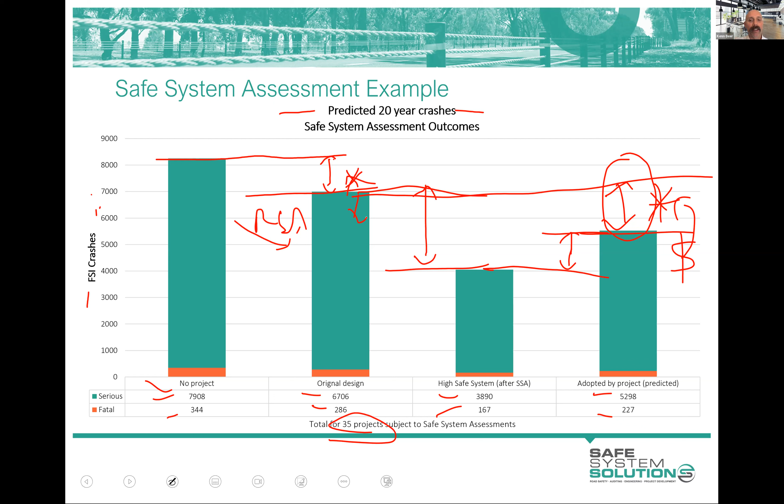One of the really interesting insights to me, the first thing is that this is naturally going to come down. The act of having your project safe system assessed as a designer will mean that your next design will be better in terms of alignment with safe system principles. You get that feedback. You see this and you go, oh, okay, that's interesting, or maybe I should try that for the next one. I'm going to get a safe system assessment done on this, I know what they're going to want. So they're going to get better and better. It's actually a wonderful education tool from that perspective. Road safety audits have been doing that forever. They're a great education device as well.

This is really interesting though, isn't it? We just talked about our aspiration of zero death and serious injury, and safe system assessments being this wonderful tool which is going to help us get there. Except these have had safe system assessment, and these are the highest alignment things that the safe system assessors are recommending. Yet we still see there 3,890 serious injuries and 167 fatalities over the next 20 years.

Now, in one sense, this sort of shows that the evaluation was a fairly realistic model. And if you look at what are in these crashes, we sort of call this the residual. These are things like motorcyclists, and it's very hard with the infrastructure and any behavioural change initiatives or anything like that to reduce and eliminate that trauma. Some very high-end speeding crashes, we talked about those, really high-end inappropriate stuff. So they're big chunks of this trauma.

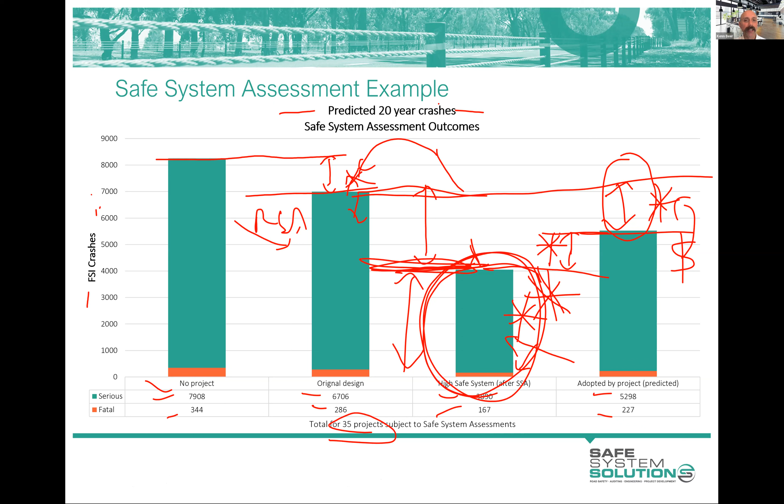We can bring this one down through some cultural change initiatives and trying to lobby for more funding and better community support and those sort of things. So hopefully we'll see all of this come into play better. So hopefully that makes sense to you. And I do that just to show that this is a really valuable exercise to go through. There's some actual independent evaluation reports that show that. And we want to start integrating it heavily into our infrastructure design planning process.

And I've pointed here to some benefits. I want you to be going out there and doing safe system assessments and encouraging your clients or your colleagues to be doing safe system assessments, and you can be the one to help them do that, because the more of these we can do, the better. We'll see more progress in our attempts to really turn around the death and serious injury happening on our road network. So a few more things to arm yourself with in terms of benefits of safe system assessment.

It's a great way of determining how well a project or proposal aligns with safe system principles. And that is something that we've craved for a long time as industry, because people were shouting around about safe system. Oh, we're committed to the safe system. We've got to do safe system. And people are like, well, what does that actually mean on the ground? How do I actually do that? This is a good way to do that.

Great way to compare project design options. So at the moment you're in the middle of doing a safe system assessment on just one design option. But if you had three, it'd be a really nice way to score them and to see that difference. A good way to inform design changes that'll move a project closer to the objectives of eliminating death and serious injury. Good method for assisting planners, designers, project managers to move the safe system approach from theory to practice. And that's what I talked about in the first dot point there. Sound basis for future planning and design of infrastructure.

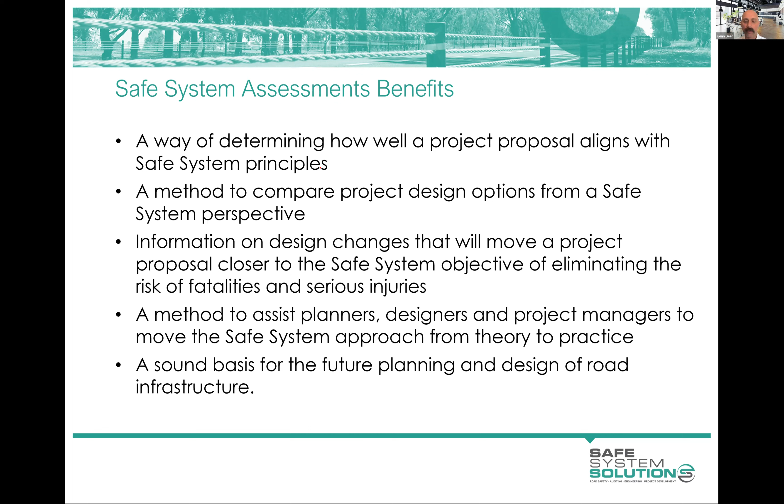So really beneficial stuff. But let's talk about the process. Okay, you know now how to do a safe system assessment, and you're going to prove to us you understand how to do one and how to fill the things out. But in terms of the context of a process within an organization, road authority or the like, when should we be doing this? So if we take the steps of development of a project and we say concept, draft, details, build, and open it to traffic, and by traffic there, I don't just mean cars, I mean pedestrians and cyclists as well.

So safe system assessments give the best value at these early stages. And then road safety audits are really well suited after we've got some detail there. There's a few reasons for that, but one big one is often here you're dealing with multiple ideas on how this can be achieved. So you have options on the table, and this helps you rank options. Road safety audits don't rank options.

The next one is that we're looking for safe system assessments and safe system assessors to really push a project team to strive for higher safe system alignment, to really get it better from a safety perspective. A road safety audit's really about managing any risks within that project, that you're not creating new risks as a result of building this. It's less about looking for opportunity to get better safety benefit.

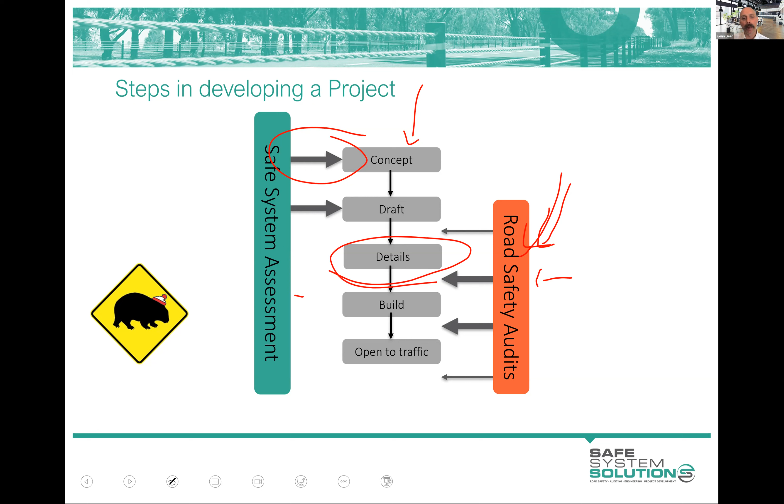In terms of those differences, both a road safety audit and a safe system assessment do a good job there of identifying the likelihood of crashes. The severity of crashes is generally better done in safe system assessments because of the way it's scored and thought about and segmented up. I say sometimes for road safety audits, and the way that the 2022 Austroads Guide to Road Safety Part 6 is now framed, it should be better.

Identifies issues that impact exposure. Well, that's pretty rarely done, if ever, in a road safety audit, but it's its own entity within a safe system assessment. Recommendations that improve road safety outcomes. Well, they both do that. We can't say they don't. Considers all road users. Yep, they're both able to do that. Focuses on fatal and serious injuries only. Well, that's the aim of the safe system assessment, whereas a road safety audit will also look into other injury and minor bingles. In practice, safe system assessments do that a bit as well, but in theory, they're just focused on the fatal and serious injury.

Looks into safer vehicles, people, maintenance impacts, post-crash care. If that's part of the scope of the safe system assessment, it's all set up to be done with those qualitative questions we went through yesterday. Makes recommendations to redesign the project if required. Whereas audit's really not about redesigning the project, but highlighting risks and pointing these things out. And encourages innovation. I talked about this in module 1, where an audit is there to pick up risks and does not report on the good stuff. That's not the audit team's role. They simply point out the risks.

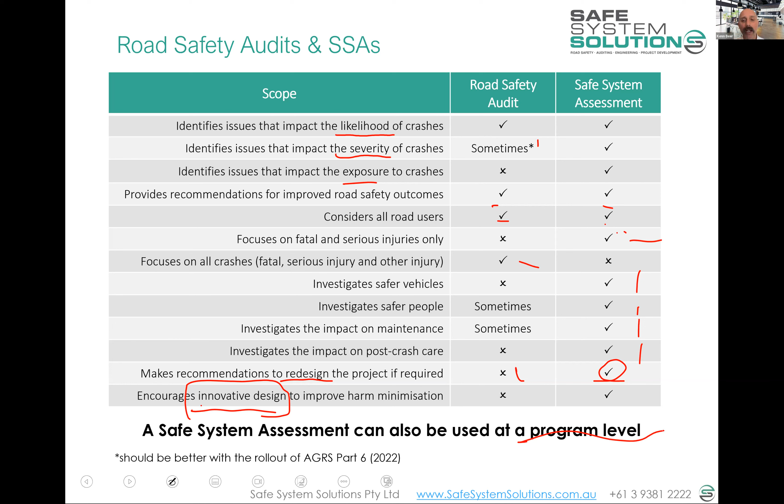So we'll run through, after somebody said, yep, we're going to do a safe system assessment on this project, how that process sort of plays out.

We will have our little break at some point. Kathy, you're going to have to, oh no, I've got my watch on. I can work out when a good time for that is.

But let's have a look at this process. So I haven't yet introduced you to the fact that there's two types of safe system assessments. There's a full safe system assessment and a rapid safe system assessment. If you're in Queensland, you call the rapid a light safe system assessment, but it's all pretty much the same. I will, in one of the slides coming up, show you the difference between those two. It's not like one takes an hour and the other takes 10 days. They're fairly close to each other. But one does have some efficiencies in it. But the client is going to decide that. And I say client, it could be the road authority, it could be the project manager, it could be the project sponsor, whatever it is, they're going to make that decision.

And then they're going to go out and seek a safe system assessment team. And so the client, the designer, whoever's going to do that is going to find either a consultancy or people from another department or whatever it is, and get them and engage them to undertake this safe system assessment.

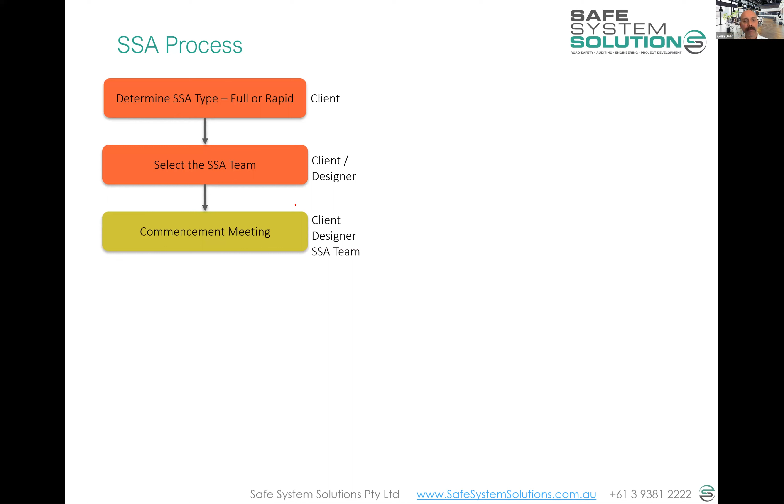And there'll be some sort of commencement meeting, some sort of thing where people get in the room or on Zoom or Teams or whatever it is and discuss the project. And this is where they're trying to really understand the context of the project, ensure that all the information's been passed across, find out things that are needed in order to get a really good understanding of the assessment and make sure it's a rigorous assessment. That all happens there, and everybody's kind of involved in that.

Then it's really over to the safe system assessment team, and they'll get out and they'll look at the site with the plans and review things and predict crashes in the future and look at how it currently operates and what the pedestrian desire lines are, and a lot of thinking like a road safety auditor would do, but starting to more systematically work through those columns of the matrix, so the different crash types that could occur and the exposure to it and the likelihood and the severity of it, and making notes and thinking this all through for the existing conditions, then for all of the design options.

And that's all popped into the safe system assessment matrix, and you're getting hopefully quite good with that, and you've used it, or you're going to use it very shortly. Then the other elements of the safe system are considered, utilizing those qualitative questions that I went through at the end of last module, where we ask questions about the post-crash care and what happens in the event of a crash, how do people get there, are there going to be challenges, and all of those questions, and sort of just dot point out thoughts and ideas and things that could be of interest to the project manager and designer.

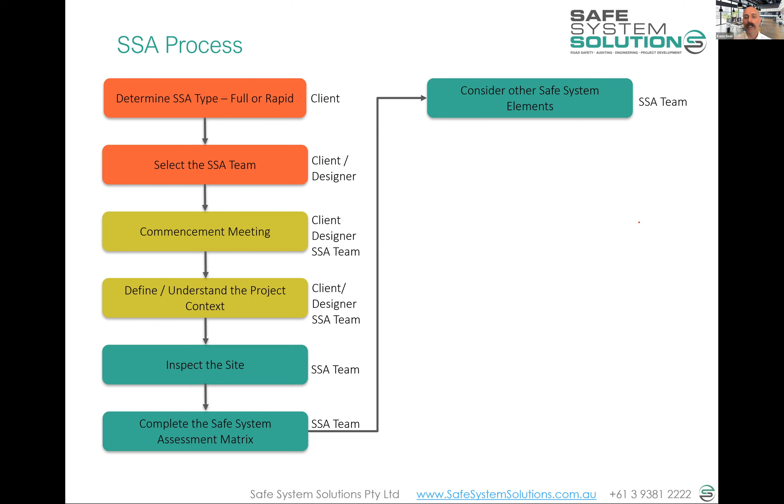Then you make these comments on any treatments that could be implemented within that design that would improve safe system alignment. So things that they could add, things they could alter, changes that could happen. And you do that for every single design that they've produced, every option. So if they give you an option for signals and an option for a roundabout and an option for a seagull and an option for a passively controlled intersection, each one of those you would talk to how can that be improved to get better safe system alignment.

And then you've got all of that and you document that in your safe system assessment report. And I pointed you at the Victorian government's template, and that's what you're using. You're welcome to use that yourself, rebrand it. They are very clear on their website to say, please use this, let's all follow the same report format. And if you do that, you're going to cover off all the sections required and it guides you through quite nicely. And there's one for a full safe system assessment, one for a rapid safe system assessment.

Queensland does have their own. They've hidden it in the Safer Roads team's file in TMR. So you have to ask them if you're in Queensland and you want to use that. They don't seem to mind if you use the Victorian template. They're very similar, but every other jurisdiction's generally following the South Australian and Victorian sort of template. So it's become pretty much the national.

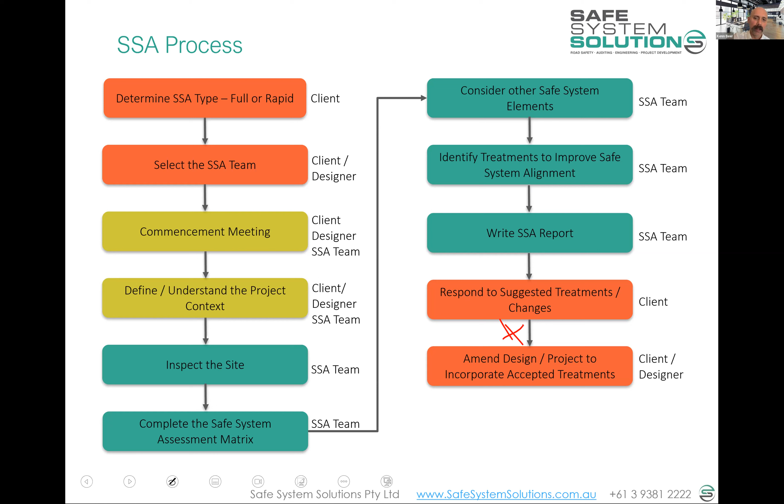In here, it can sometimes come down and then get rescored. So as a client, or as a designer, or as a project manager, you've been given these ideas, and you say, okay, well, we'll do that one, we can't do these three, we'll do that one, and we'll do that other one. You can go back then to the Safe System Assessment team and say, can you give us another score on that, please, with these new incorporations?

And that to me actually is a really wonderful thing for presentation of your project up the line to your directors and your different committees, approval committees and the like. The reason why is you can provide this: here's the existing conditions, here's the design that we produced, and here's what we've got to after the safe system assessment. So you show that benefit and you say, well, we've really worked hard to get as high alignment with safe system principles as we possibly can. And there's proof of that, taking on this advice and trying to incorporate it in.

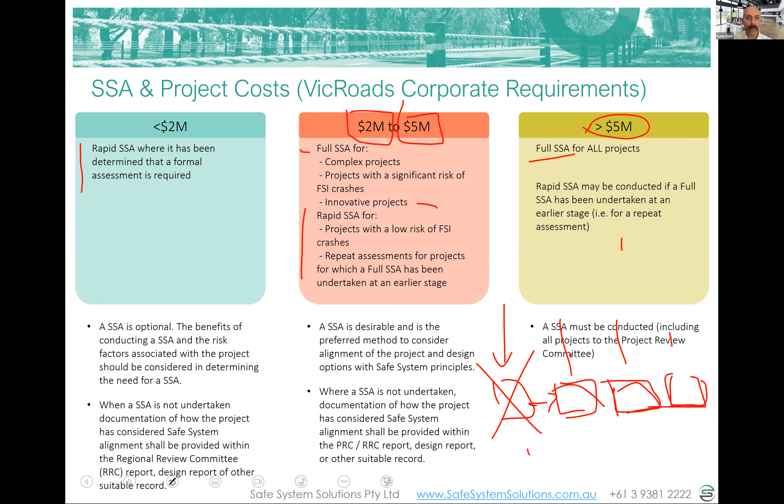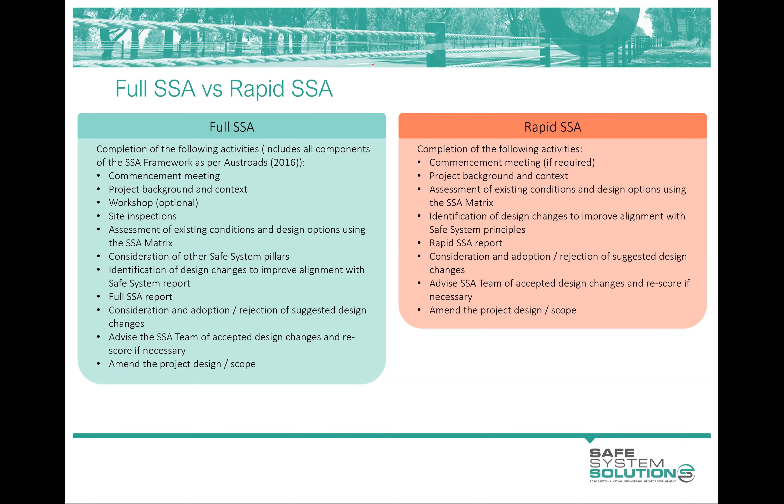We'll pause there and see if we have any questions. Yeah, Ken, will the Registered Professional Engineers Victoria affect being added to the list? No, it won't affect that. There is no requirement to be an engineer to be on the list of recommended safe system assessors or pre-qualified safe system assessors in South Australia.

The engineering registration bill and the like is simply trying to provide some sort of assurance that engineers are active, practicing, keeping their skills up and the like, and competent in what they're signing off. But no, it's got no connection whatsoever. Good question though. I toy around with whether it's a good or a bad thing. I'm slightly off topic here.

Queensland has had the registration for a long time, and there's a little bit of reluctance in Queensland. This is my opinion, I haven't done a structured study on this, but to innovate or to alter, to deviate from documented standards and guidelines with road infrastructure, due to the fact that they feel they're taking personal responsibility or accountability if they do that, and that's all due to this engineering registration. And so I think that's a bit of a downside, because we can't progress if we just follow standards and guidelines.

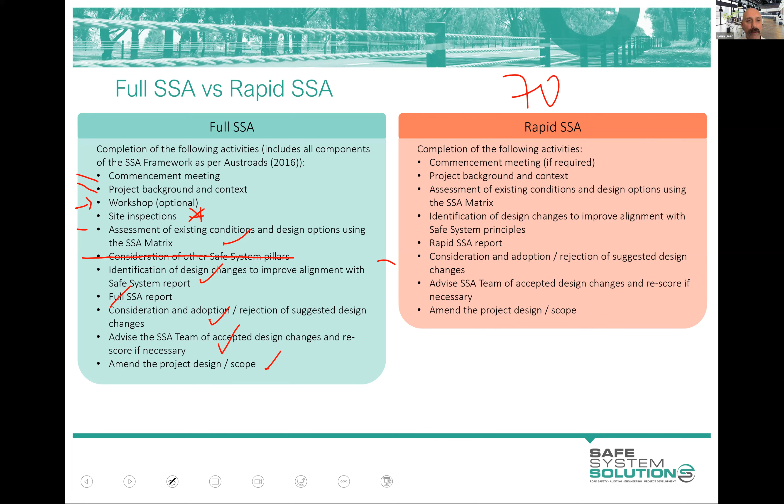So I'll pause there to take any questions from the group associated with the process of doing safe system assessments, what different jurisdictions are doing, that idea of getting pre-qualified or on that list of recommended safe system assessors. See if anybody's got any questions on that, and then I'll give 5 minutes, and we can fill up our afternoon coffees and have a stretch, and then I'll do a short, maybe 20 minutes of discussion about some general safe system road environments. And then I'll give Kathy an opportunity to just show you in the learning management system how to finish off the course.

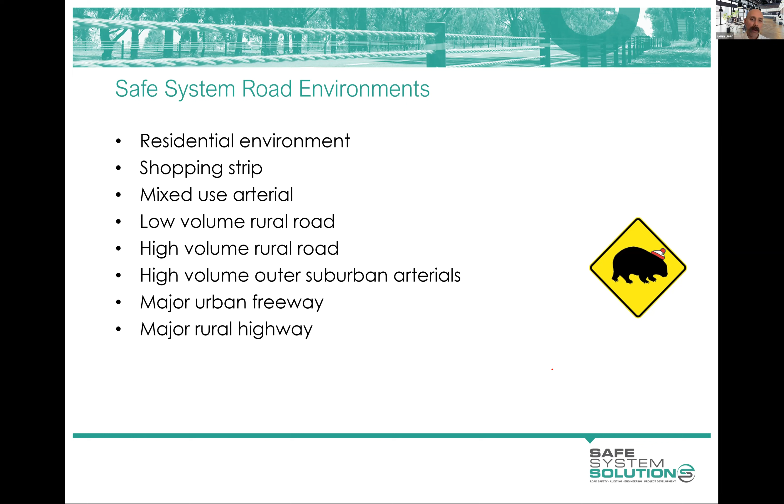So I want to cover off residential style environments, shopping strips, mixed use arterials, low volume and high volume rural roads, high volume outer suburban arterial type roads, major urban freeways, and major rural highways. So if we start on these residential street environments, I think I will get you to type a few things in. It's been a fair bit of me talking this session.

Just pop in the chat any ideas you might have to get better alignment with safe system principles, so reduce the risk. And is that going to be exposure, likelihood, or severity? I'll give it a minute here, see if we get.

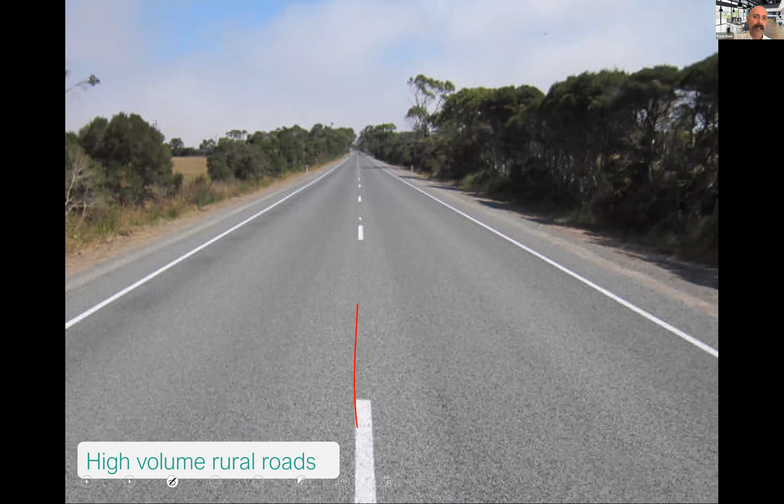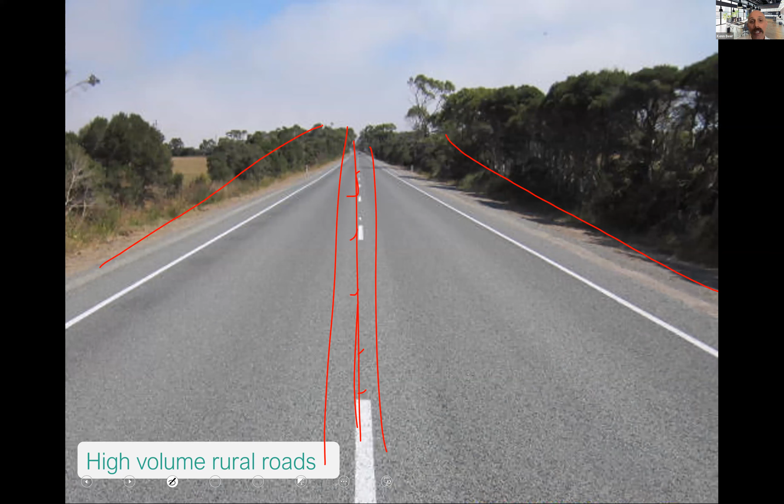And let's keep going. When we do have the higher volume roads, now this is a higher volume road. It doesn't look like it at the moment, but trust me, it is. You don't stand in the middle of the road when it's very busy. These are the ones we're going to invest the money in the infrastructure of providing those central barrier systems, and then outer barrier systems, hopefully, and getting really good safe system aligned roads to keep speeds high. And we want to attract people to use this road instead of that other road.

And as we get to the intersections, we're going to try and manage those speeds within tolerable levels. I think roundabouts and compact roundabouts are going to be huge. If you've got a central barrier system, it can work really well to think about, well, okay, vehicles coming out of access points, driveways and the like, they can come down here and they can U-turn to go back that way instead of having to have a break in your barrier system, for example.

And if you strategically plot out a route like this and do a proper route strategy and a corridor strategy and think about things from that sense, you can really create some pretty nicely aligned safe system environments, targeted roundabouts, and then some intersections you might be able to make left in, left out as a result of that. And potentially you still do have to have some different turn facilities at different points, but that, at a very high level theoretical way, is a pretty wonderful way to treat these roads.

If you can't get the roundabouts, there are your different options, which we've talked about some of them. I think the rural intersection activated warning signs or speed signs, or the stars, are pretty good. A lot of those in Victoria, New Zealand, Queensland starting to put a few in, which is where a speed limit on the main road as a vehicle approaches here drops down to maybe 70 from 100 or something like that.

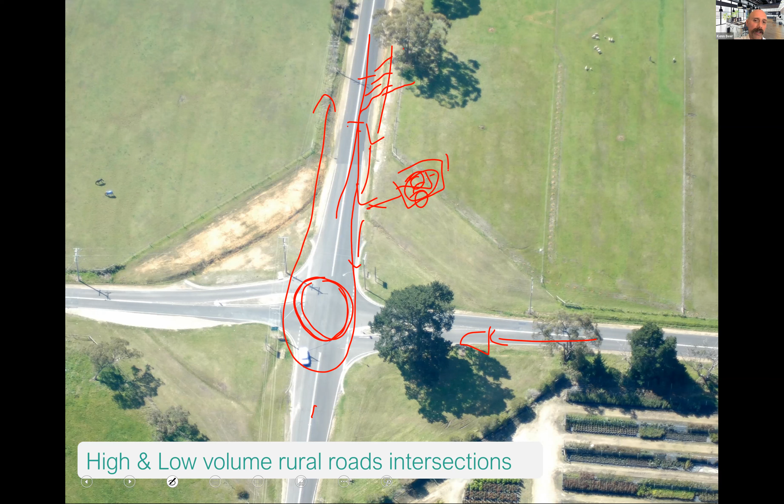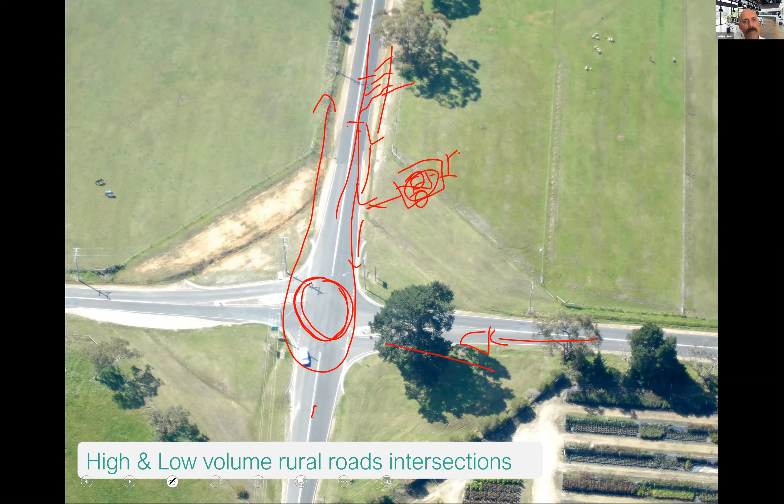South Australia is doing some trials on radar-based, solar-powered signs, really cheap stuff, which is pretty exciting. I'll do a few more and then I'll hand over to Kathy. High volume outer suburban arterials and rural arterials are the ones that have been designated traffic routes, and that is a traffic route.

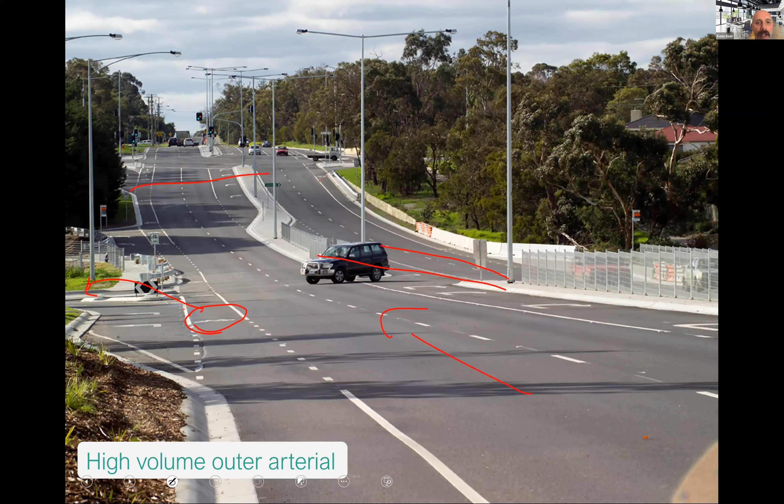We start to really need to make sure we don't have vulnerable road users mixing on these higher speed 80-kilometre-per-hour roads; those have got to be separated facilities. We're trying to block off these different turn maneuvers because the crash forces there are too high. We're still interested in the conflict points and slowing vehicles through the intersections because we know that they're that area of danger.

This is where you look for underpasses or overpasses for pedestrians, separating pedestrians off, not having that access. So they're not great places to congregate, to hang out, to have a coffee and things like that. That's not their function. That's not their movement and place categorization. And so we're more free to do some of those restrictive things.

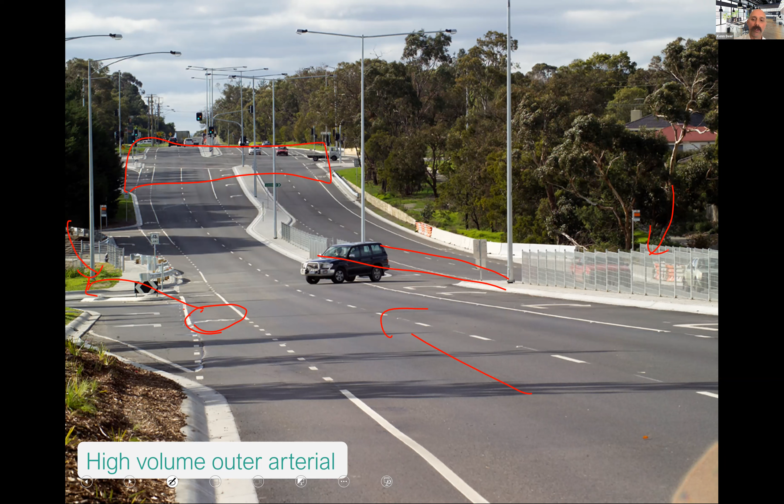Major freeways really operate with quite high alignment with safe system principles because they don't have right angle intersections. They don't have vulnerable road user presence, crossing and the like. You do actually get quite a lot of pedestrian trauma on motorways, which is more a result of vehicles breaking down, or vehicles like taxis pulling over in the wee hours of the morning, and usually intoxicated people getting out and throwing up or whatever they're doing, and there's incidents associated with that. So it's quite surprising how much pedestrian trauma there is on motorways.

Cycling trauma there's very little, next to nothing. But it does have these really good aligned features with safe system principles. The point where they don't do well from a road safety perspective is as flow breaks down, because when it's free flowing, it has really great road safety performance. When it's absolutely congested, there's not enough speed to cause damage in the crashes. It's as flow breaks down, but there's still the speed there.

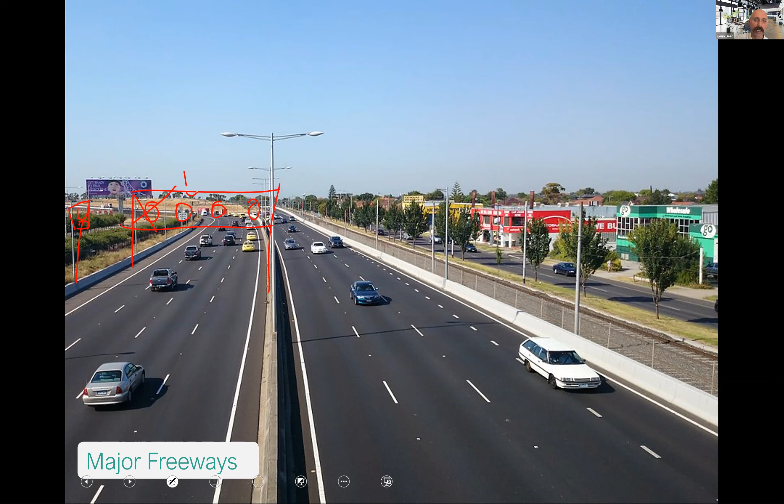But anyway, our managed motorways are an amazing tool in this space, which is where you have lane management systems. You have on-ramps with ramp metering, where you've got your traffic signals to balance that flow. You can use lots of technology to block off lanes, to change speed down proactively, to warn of things, and we get lots of benefit out of this. Doing the safe system assessments on these urban motorways, it's still the same process, but you often are delving into ITS, intelligent transport systems, managed motorway stuff, electronic communications, how control centers are set up, and thinking holistically around processes behind the scenes as well.

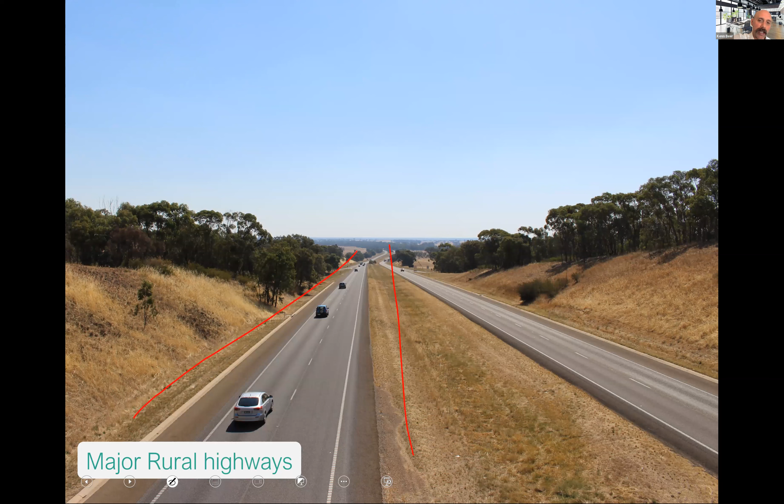And major rural highways, I'll finish on this one. We saw that our continuous barrier systems are what gives us our high alignment with safe system principles. And we're seeing that roll out on many of the major rural highways these days. We know people are going to fall asleep. We know they're going to run off the road, and we need to try to manage the energy in that. We're going to try and stop them doing that with audio tactile edge lines and good rest areas and all these things, but they will continue to do it, and we need to manage that.

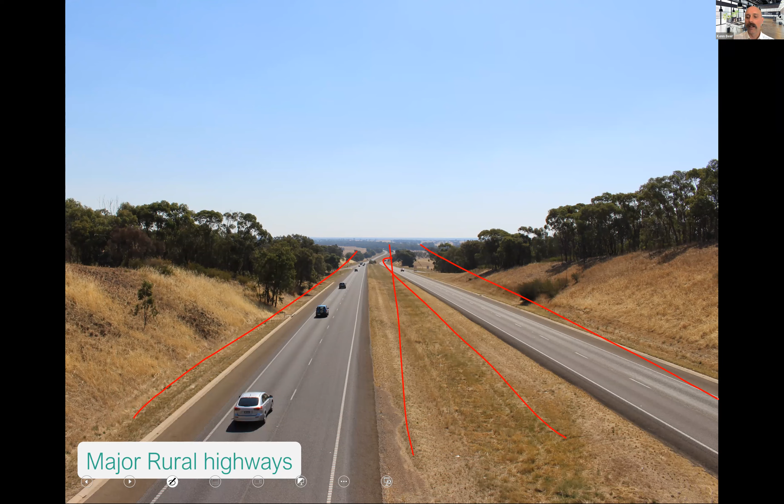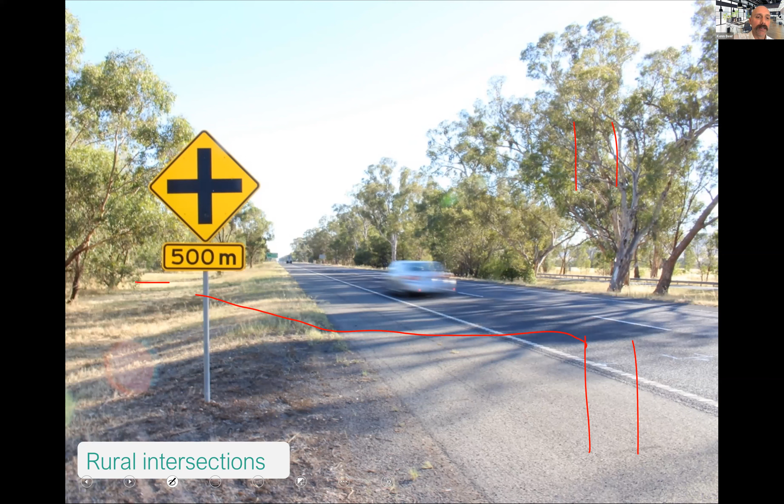And any at-grade intersections really need to be grade separated to continue those speeds on these major freeways. The only way you can really operate an intersection to keep high speeds of the through vehicles and have high safe system alignment is to have a long acceleration lane out, then enough space for them to change into the right lane, then long acceleration in the median back, enough to merge and get back across, and then they can make their turn or go straight. And so you've got to have the median there.

Now, that's all fine. It takes up a lot of land and the like. It can be done. In some situations, it's cheaper. It's quite a cost-effective way to do things. Because you've got the speed up there, the difference in speed in the crashes is good.

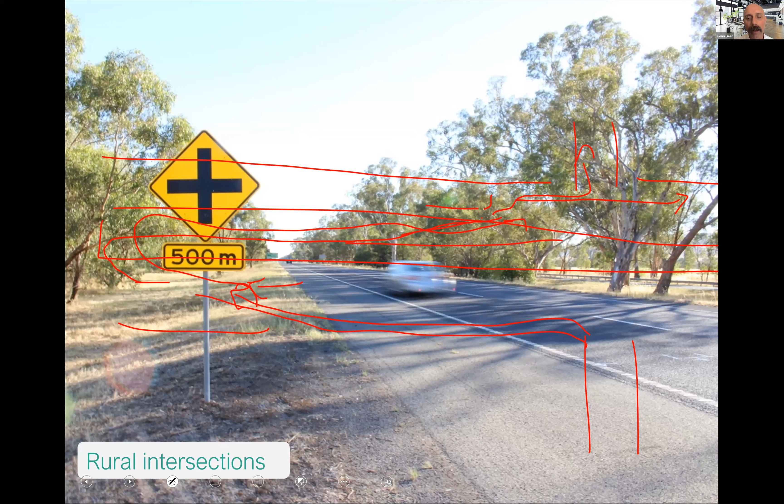Got to think about secondary crashes and make sure you've got your continuous barrier and the like. You've got to merge from the right here, which is never ideal. But again, if you've got the speeds up and they've got good distance and good sight lines, they can merge in there at an angle where if an incident occurs, it's friendly and they've got the speed up. So that's a possibility if you need.

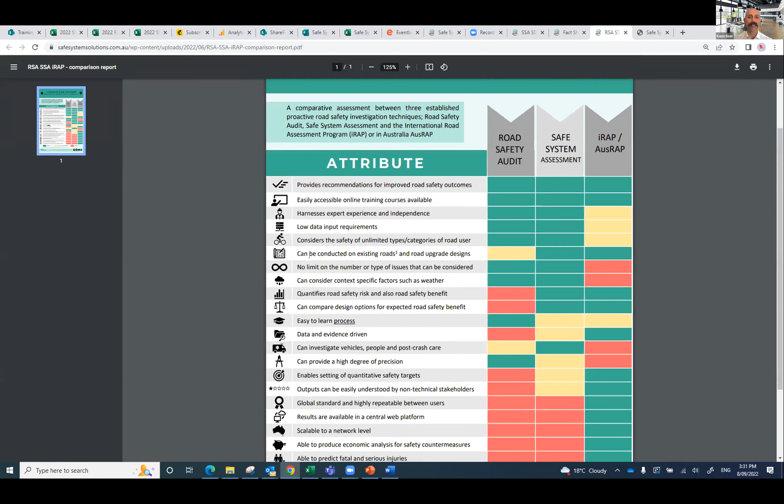Sorry, go down to that road safety investigation techniques, next one down. Yeah, that's the comparison report. I didn't mention that, but that's a nice one to talk about the difference between road safety audit, safe system assessments, and AusRAP, star rating of roads and the like, and just show what the differences are, which is helpful to some people because they've heard of these different terms, or people asking, why aren't we doing this one, or why are we doing that one. So that's there on our website if you want to grab it.